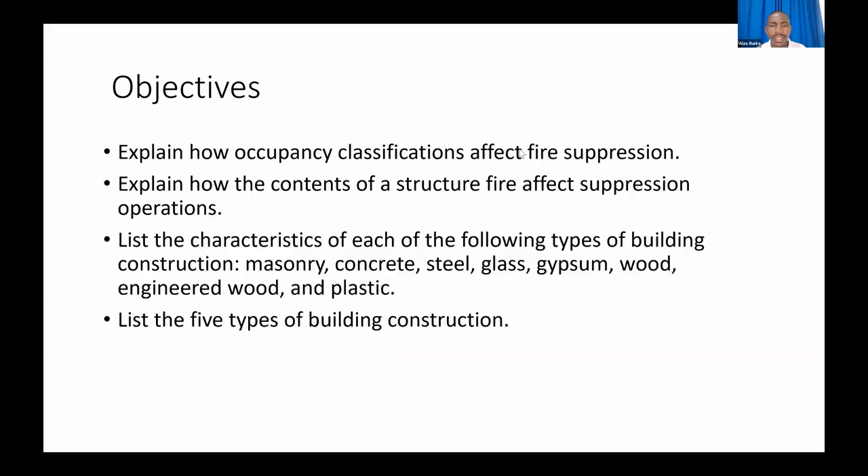Well, how are these 3 people waiting to be admitted? Oh yeah, yeah, yes, yes, yes. It's good now, now it's just 2 in the waiting room.

So building construction affects how fire grows and spreads. That is how the building is built, it will definitely have a bearing on how, if the fire would grow, how would it grow, and how would it also spread. Firefighters need to understand how each of the types of building constructions react when exposed to the effects of heat. This is also critical when we're thinking of how safe it is to enter a particular structure, at what stage in fire development, and when would it also be necessary to evacuate and leave the house. This is very critical for our safety.

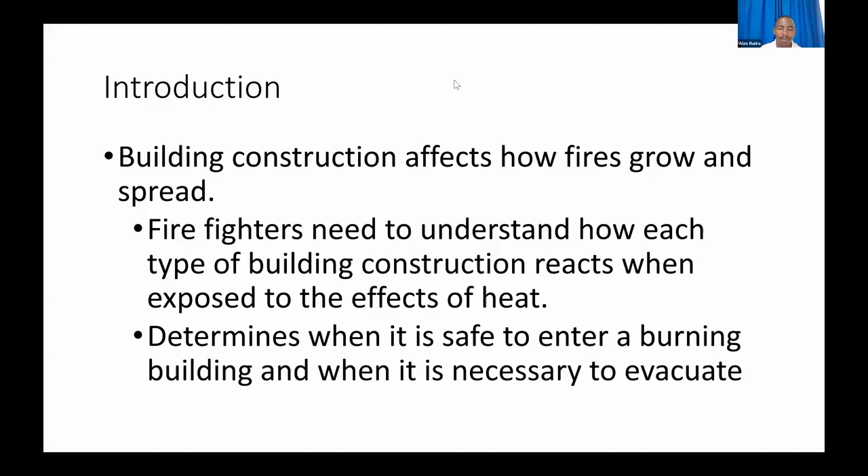There are these 3 key factors that I think would be important for us to reflect on today: first and foremost, the occupancy, then the contents of the building, and then the type of construction materials. Like I said, we are not going to build today, it's majorly going to be just learning some basics.

So let's define these words. Occupancy. I wish I had some chance to just ask us what is occupancy, and we just think about it. Then what are the contents in this context of building and construction? Contents will mean what is in the structure, what is in the house. And of course, just like we are familiar with the various types of construction materials, what is a house made of? How does it affect its fire safety or fireproofness, etc.

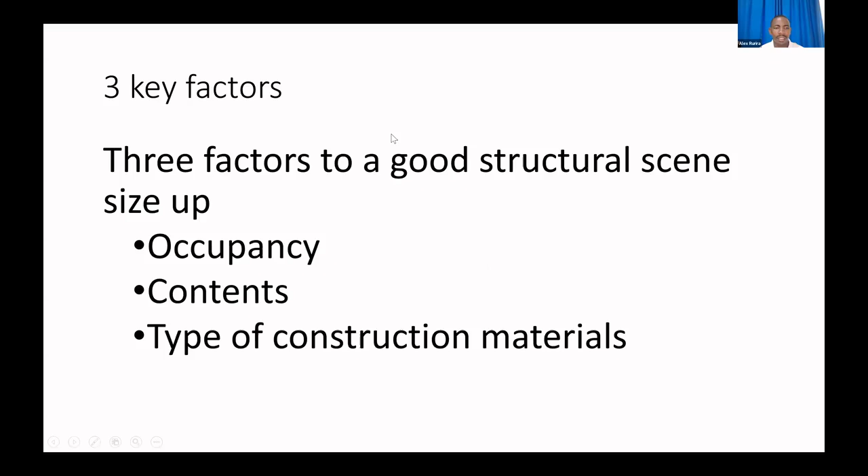Now, occupancy. Occupancy is how a building is used, just simple as that. For example, that's why in our government there is something called changing of user. You can change the use of a building, and by that you would also change the occupancy. It is about who is likely to be inside that structure, maybe how many of such people, what kind of setup, and what would they be doing at a particular time.

Occupancy is what makes the difference. If you're in your station and you're on duty right now and a call comes in, and you're notified on your call center that we have a fire in a high school, not during the holidays, during the school days, and it's a dormitory at midnight, what that means is that you will actually imagine the whole stack of students stuck in a dormitory with fire at night. It means they could be half asleep or sleepy, in some sleepy stupor. It is pandemonic. And this is also the difference: the same dormitory would be meaning something lesser to you if it was on fire maybe at 1 o'clock in the day, on a weekday.

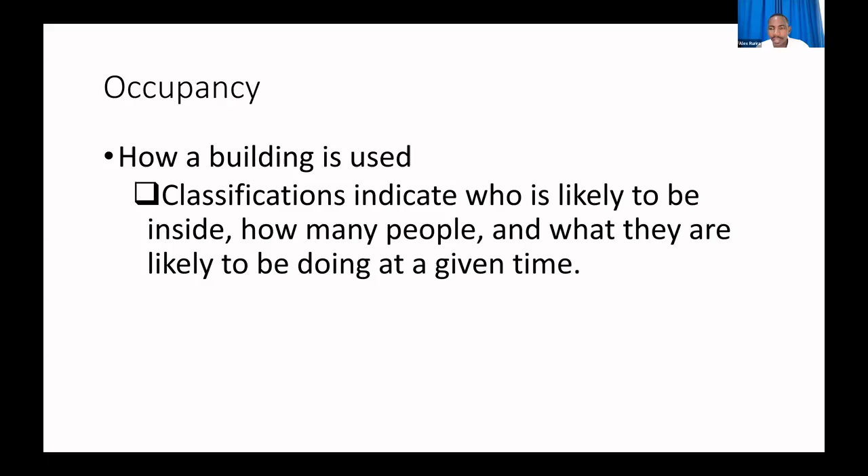Yeah, that is occupancy. So moving swiftly to content, which is a key factor as well. Content, just as the word implies, means what is contained in the container, that is, the building we're talking about. What is in the building? Of course, there's a relationship between the contents of the house and the occupancy.

For example, moving with the same example, the dormitory of a school or hostel - if it's a hostel, it means at the same time we have as many beds as there are likely occupants. Beds have lots of flammable material like mattresses, beddings, clothes, and other personal effects. So the contents of the building relate somehow to the occupancy.

Just like if it's a commercial building, let's say a mattress warehouse - we know they sell mattresses or tires, for example, and we'd know there are so many tires stacked up in storage and the display area, and that's directly part of the fire load. We can guess the fire load in the building, how much fuel there is, and even the properties of the fire, like how toxic it could be, because the element of toxicity or quality of the fire is largely and directly dependent on what is burning.

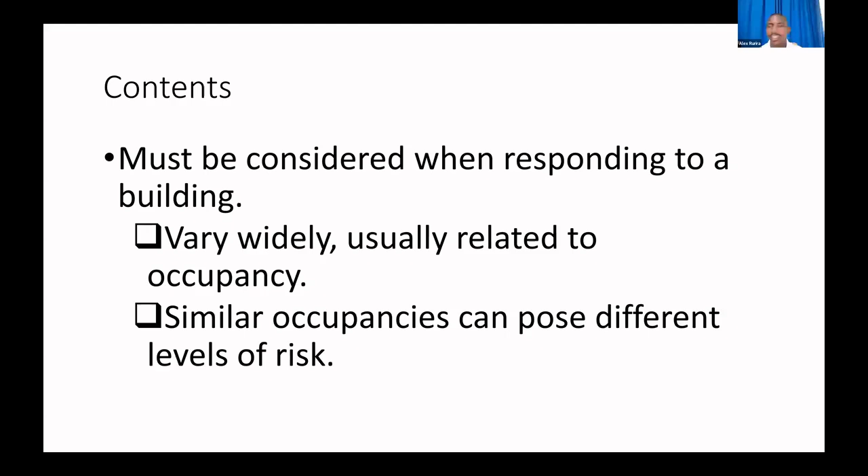fire meteorologists. You can forecast that this is a house built of masonry construction, and so maybe after 30 minutes of this kind of fire, this is the likely strength of the house. This is what could happen with this kind of roof. This could cave in, etc. So the properties of the materials used to build the houses determine the basic fire characteristics of the building itself.

And I want us to think, for example, I don't know who is in the call, of course Howard and Ed are from the US, the rest could be from Kenya and maybe other countries. But speaking to my fellow Kenyans, what are the popular construction materials used in our country? Think about it. Then, have you thought about the implications of these materials, not really how fire behaves, but how the particular construction and construction materials behave during the fire, you know?

What are some of the properties or factors of construction materials? One of them is combustibility. Combustion, as you know, is the chemical process of fire, and this is directly about: is the material used to construct the house flammable? What is the building made of? And whatever it is, can it catch fire, in literal terms? In Swahili, someone will say, inaweza waka. Combustibility. Is it flammable?

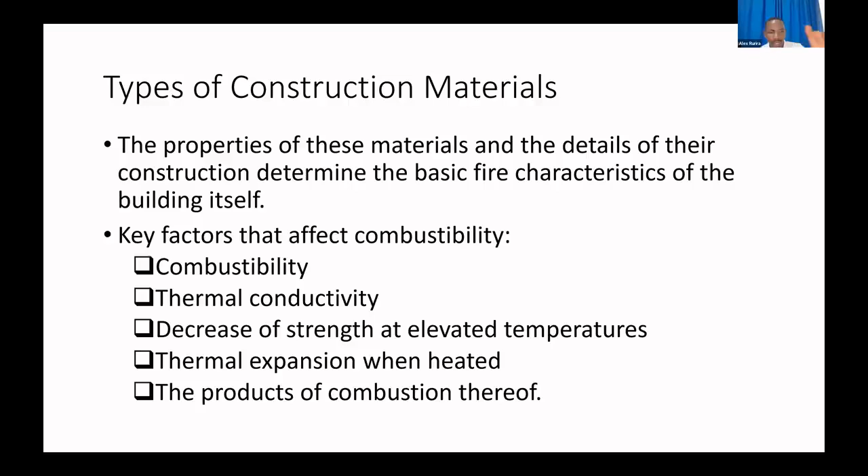And so for about 10 minutes, we're going to just look at some of the common construction types in Kenya and abroad. We're just going to look into a few and some of the properties. And this is important for you to know so that as part of your size up, you're able to take the necessary precautions, and also as part of your actual fire suppression.

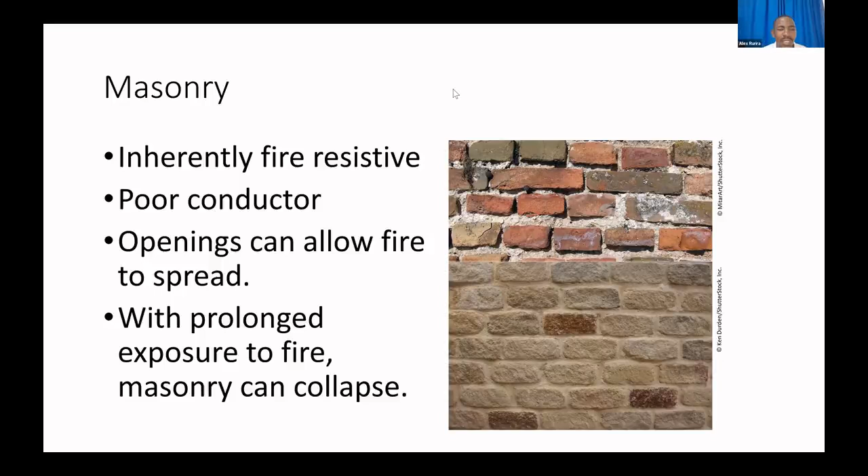So it means that you'll be having sand, ballast, cement, and then inside will be steel. You cannot see the metal, but it's in there, somewhere in there. So naturally, this is fire resistive. It almost has the same characteristics as masonry. The steel is still inside, but it's in there.

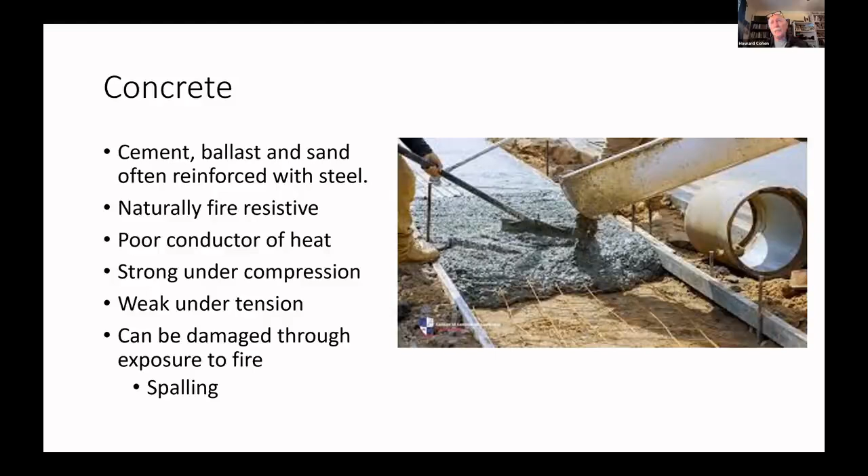Hey, Alex, let me interrupt you for a second. Considering the time, and you're still having some issues with how you're coming across sound-wise. Can you tie things up real quick? Your quality of sound is good for a while and then it starts to break up. So if you could just tie things up, plus we're almost running out of time. Okay? Sure. Thank you. Yep. Yeah. Thanks, Howard.

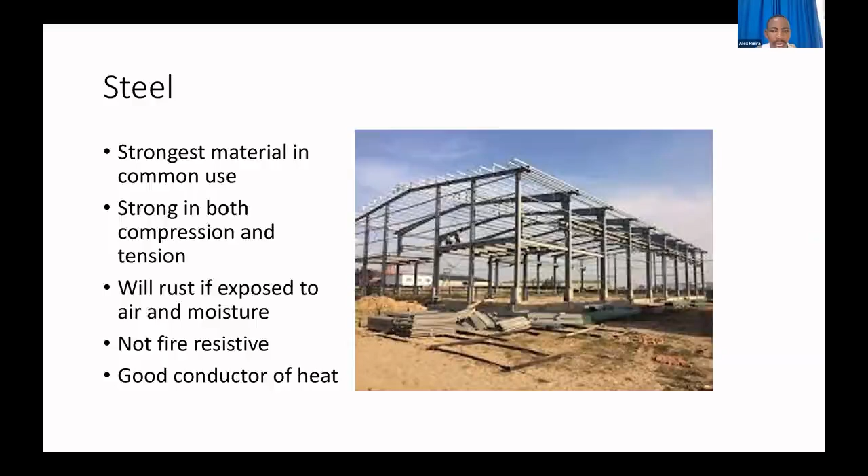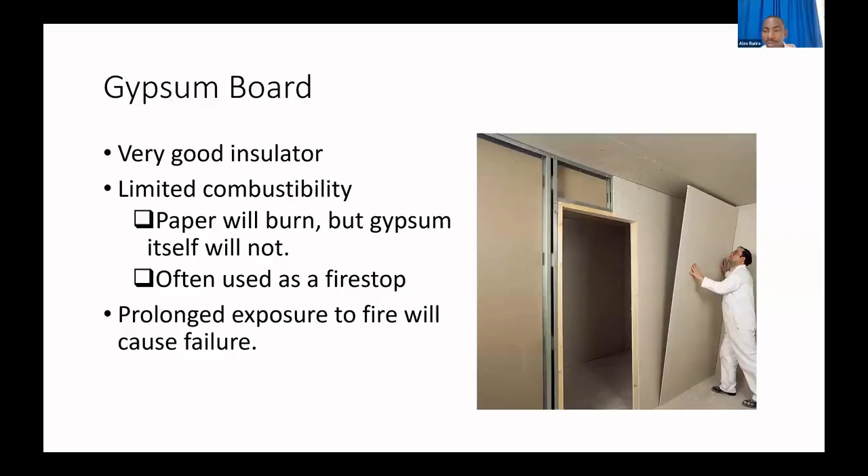So we could stop here, and I just wanted to consider that this is part of the information that you require when you are addressing a particular fire of a house or building. And the structure, of course, will invite particular challenges to you, depending on what is inside, who could be inside when, and the material used to build it. And this is a key for saving the lives and also the property, of course, the contents and the house itself.

So I would like to stop there for today. I think it's a conversation that we can keep having. I have a few more slides I would share if we had maybe a longer time. But I just think you should have this in mind, and this will be critical in your decision making.

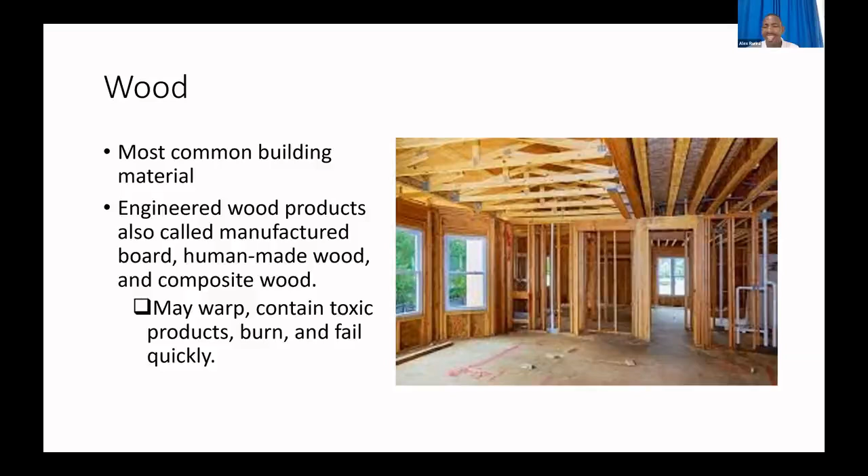Alex, it's a great presentation. Unfortunately, there was a little bit of sound stuff, but not enough to distract from the whole message of your session. Really important. I really appreciated how you highlighted that you just don't go running into the building. You've got to think about what the building is constructed of, what's in there, who's in there, what are the dangers around it. It's all part of increasing our awareness on the scene. And that's what's so critical, not only for being an effective and efficient firefighter, but also for our safety and for the safety of any people still stuck in the building, in the space or around us. So great presentation. Thanks a lot.